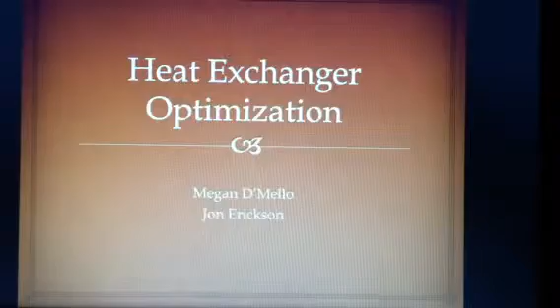I'm Megan D'Mello. And I'm Jon Erickson, and we're going to talk about our heat exchanger optimization. The problem was to create a heat exchanger that will transfer 1 megawatt of thermal energy. In the problem overview, there were variables that had given values and variables in which the teams had to create

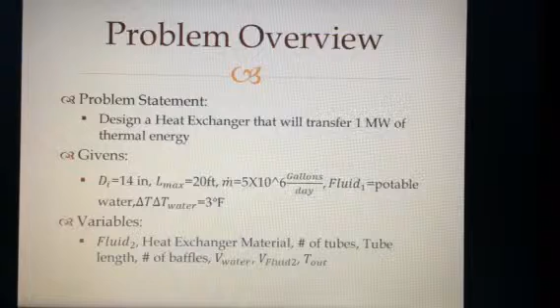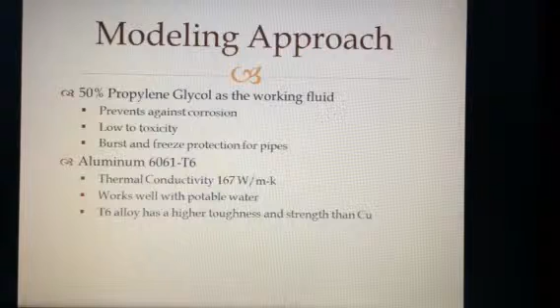their own values. During the modeling approach, we decided on 50% propylene glycol as our working fluid. This is because it prevents against corrosion, has a low toxicity, and it protects against burst and freezing for the pipes. The material that we chose was aluminum 6061-T6. That's because it has a high thermal conductivity, it works well with potable water, and T6 alloys have a higher toughness and strength than copper.

Using HEEDS, we optimized our heat exchanger. We used 4 variables: the tube length, the number of baffles, the velocity of the fluid, and the velocity of the river water as our design variables. We also had numerous responses associated with those. And those responses are what we had to use for our objective, what we want to maximize, minimize, and also our constraint as well.

We decided we wanted to minimize our pressure drop, delta P1 and delta P2, and we also wanted to maximize our efficiency, the NTU. But since the efficiency is so small, we used a weight factor of 100 in order to get it bigger so HEEDS has a better chance of reaching a better solution. We also made one constraint that the baffle spacing needed to be at least 1/5 of the total length found.

The optimal solution in HEEDS was found, and the results are shown here in the slide. It's actually 206 tubes. They are 1/4 inch tubes, schedule 40. It uses 1 baffle. It's 20 feet in length, has a beta of 149.615, and an efficiency of about 0.34.

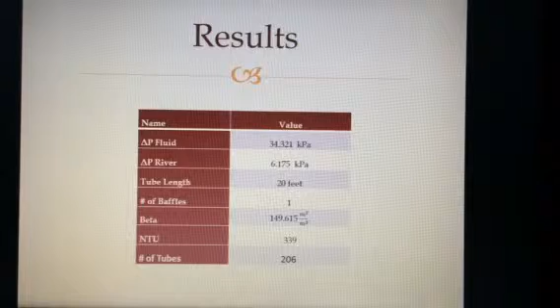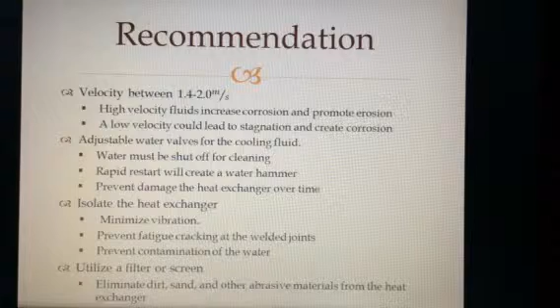Along with this design, there are a few recommendations we make. One is to keep the velocity between about 1.4 and 2.0. This is mostly because of corrosion and erosion. High velocity will increase the amount of erosion, and a low velocity could lead to stagnation and create corrosion as well.

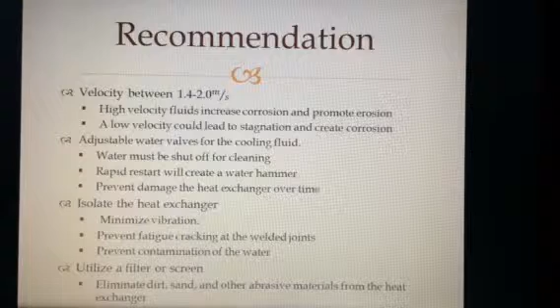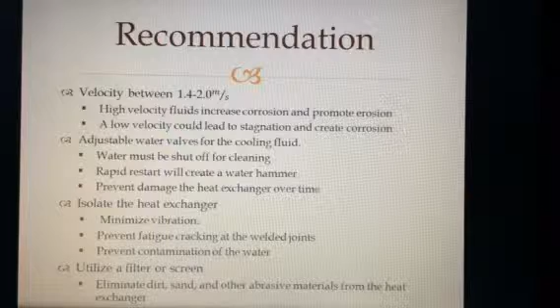And we also recommend that we utilize some kind of filter or screen in order to eliminate dirt, sand, or any other abrasive material from entering the heat exchanger. And this is going to help with the longevity and help reduce maintenance as well.

In conclusion, we decided chemical cleaning was the best way to go due to the number of pipes that we have and because we chose a triangle orientation. We also decided that chlorine would help with microbial buildup.

And finally, we decided on Exeter Company for our supplier due to the fact that they specialize in high performance heat exchangers. They also perform well in high temperature, high pressure, and highly corrosive environments, and they pride themselves on safety and sanitation.